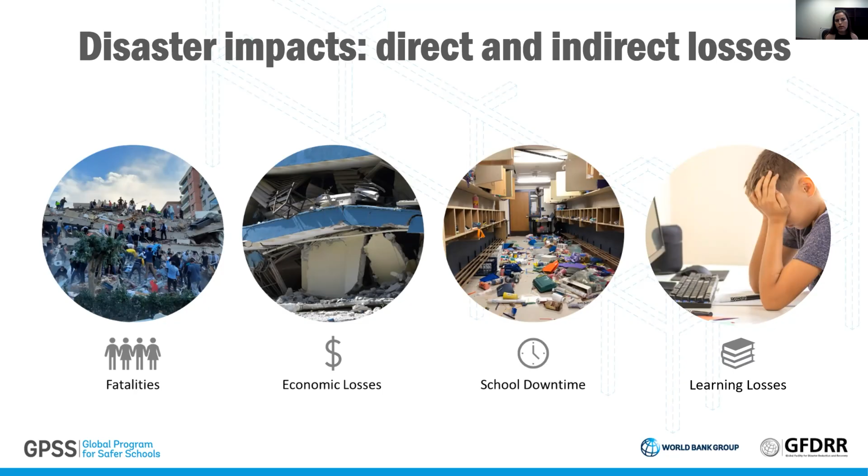And the disaster impacts are not just direct, like fatalities, economic losses, but also indirect losses, like school downtime, that have led to important learning losses, which is compromising education and development, especially in developing countries.

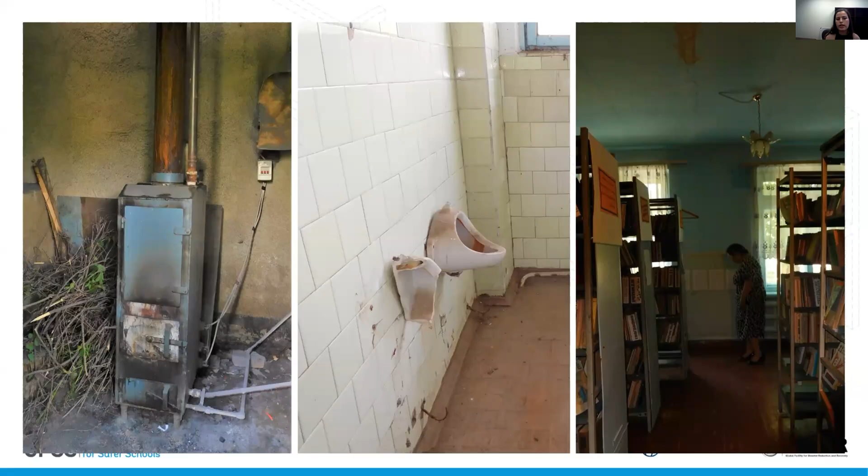But safety is not sufficient. We also learn that schools also need proper heating, they need adequate sanitation and hygiene, and they need fresh air. So they also need other conditions for an adequate learning environment.

There are a number of factors that are placing schools and education at risk. The lack of information of a school baseline, information about the condition, the physical condition of schools. There is a problem of poor quality of the design and poor quality of construction, and also lack of risk and knowledge and preparedness of the school communities.

And of course, lack of territorial planning and land use planning, that many times we are constructing schools in locations that are not safe. There is a problem, especially in developing countries, of outdated regulations. And behind all these challenges, there are the lack of efficient planning and limited resources and limited institutional capacity to be able to improve this entire system.

And there are many actors that need to be actively involved in this process. The government, who is responsible for conducting the policy reforms and investments. The private sector, who plays a key role in implementing safer, innovative solutions. The community, who needs to be aware of the risks and participates in the process of making school communities more resilient.

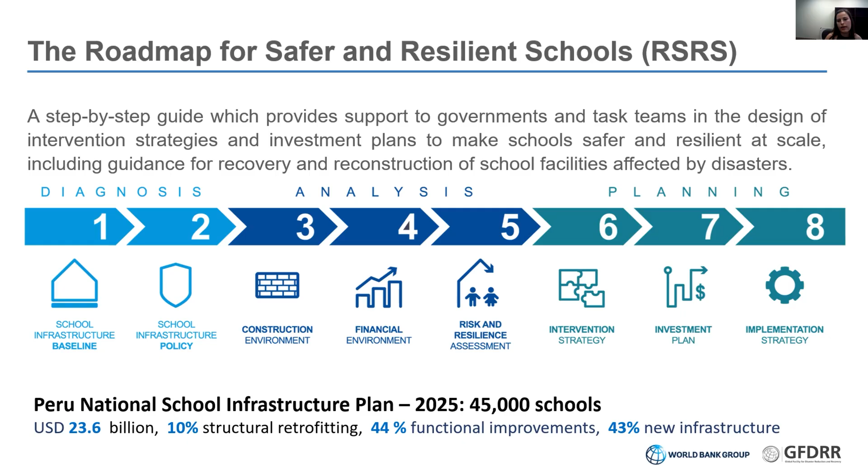And this can be organized into 8 steps. Step 1, under the diagnosis phase, is focusing on having better inventories of school infrastructure, because information is the foundation for the quality planning process. Step 2 is about school infrastructure policy, because we believe education policy should be among the main drivers guiding school infrastructure policy, as we don't want just resilient schools, but good learning environments that promote learning and development.

In terms of the analysis phase, step 3, the construction environment, includes analysis of the construction environment in developing countries to understand what factors are contributing to risk, from designing and planning to maintenance of school infrastructure. It also focuses on the capacity of the construction sector in developing countries to implement more resilient construction and retrofitting solutions. Step 4, the financial environment, aims to understand what financial sources and resources are available for governments in order to identify ways to improve the efficiency of school infrastructure investments.

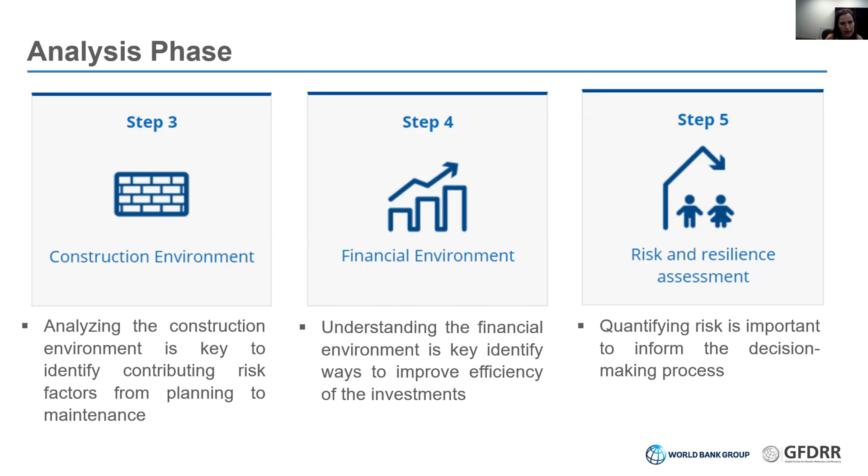Step 5, risk and resilience assessment, aims to quantify risk, because risk information is essential for the process of decision making and planning of school infrastructure investments. The planning at scale phase of the roadmap includes step 6, the intervention strategy, step 7, the investment plan, and step 8, implementation strategy. These 3 steps are basically a school infrastructure plan that includes an articulated proposal of interventions, investments, and implementation arrangements to maximize the benefit for school communities.

So we have been working with governments in different countries, applying this roadmap for these countries to be able to have this school infrastructure plan with very concrete objectives to make more efficient investments in the medium to long term.

And our other global tool is the Global Library of School Infrastructure.

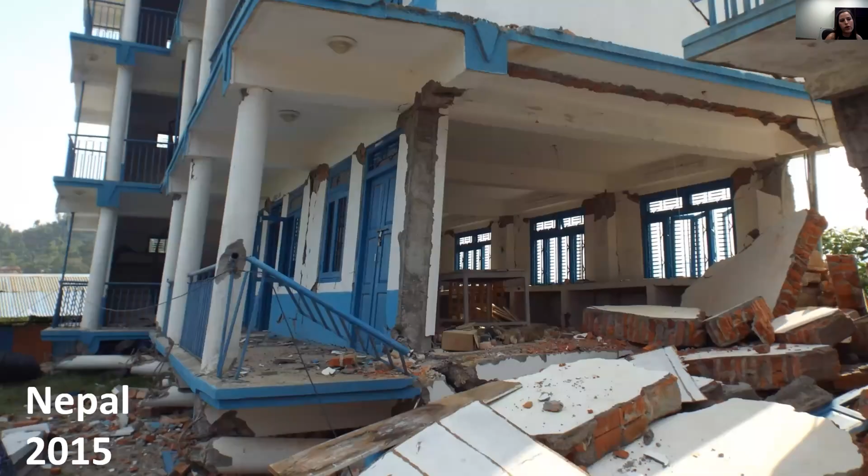The Global Library of School Infrastructure, you will hear a lot about and learn about in this training. For us, this Global Library of School Infrastructure is essential to make knowledge available about different building types around the world. It has been essential to implement these different steps that I mentioned to you in the roadmap.

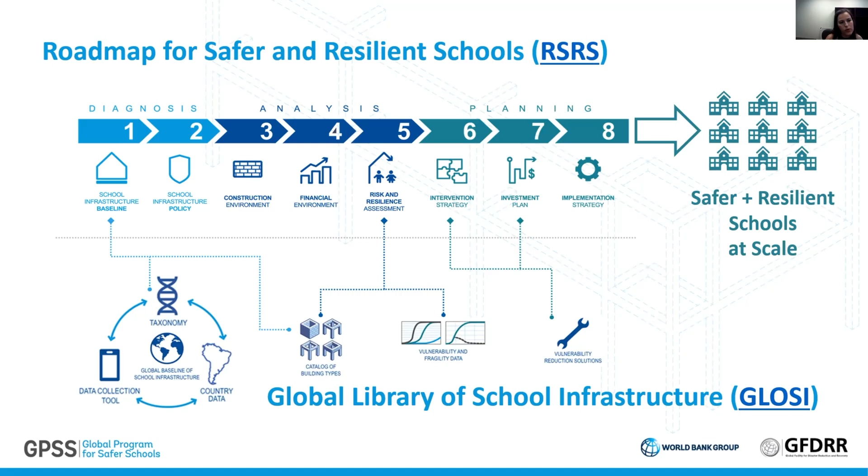The Global Library of School Infrastructure that you will learn about in this training, the roadmap, as well as a description of all the projects that we have implemented around the world, you will find on our website, which is www.gpss.worldbank.org. So you will find more information about our work.

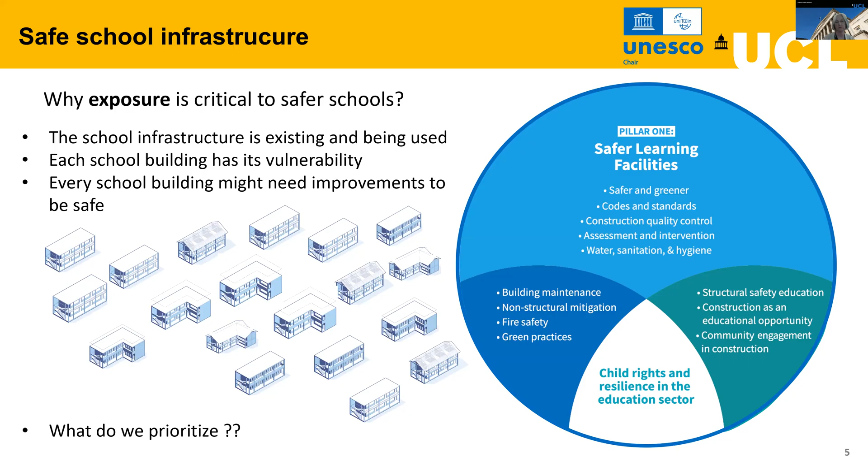So why the GLOSI, the Global Library of School Infrastructure? As you have heard from Karina, the GLOSI responds to at least 4 of the elements of the safe, the roadmap for safer and resilient schools. What we want to see here is the way in which we can build this.

The creation of the baseline provides tools for risk assessment and underpins the intervention strategy and the investment planning. Very importantly, it facilitates communication to decision makers and establishes a common language, and therefore facilitates quantitative risk assessment. In this course, specifically, we will concentrate on two elements of the GLOSI: the taxonomy of constructions and the catalog of building types, with its relation to and its influence on vulnerability.

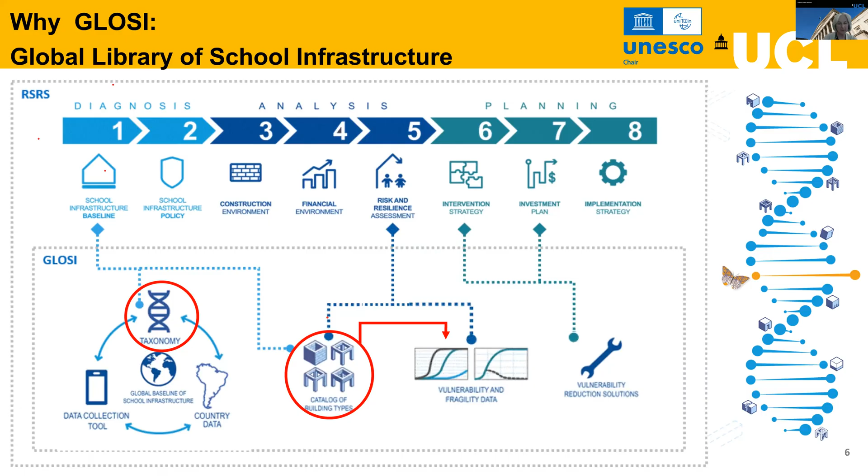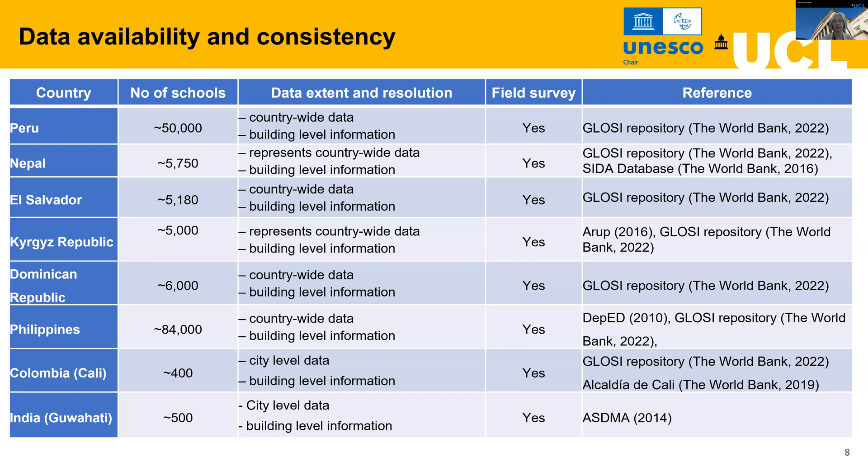From each of these countries, we have obtained different levels and resolutions of data of different quality, but data that is quantitative and that we can bring together to have a better understanding of the actual building stock in each country and across countries.

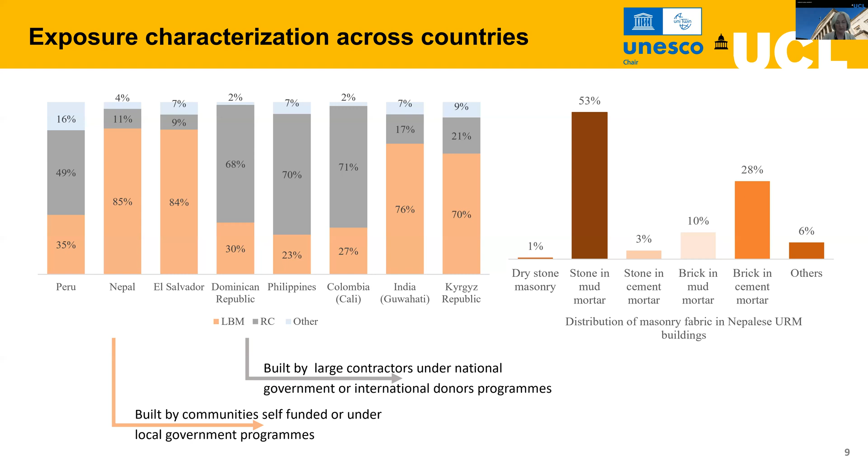Reinforced concrete structures are usually built by large contractors under national government or international donor programs, while reinforced masonry or unreinforced masonry structures are more often built by communities, self-funded, or under very local government programs, which has an impact on both construction quality and the way these buildings are built, directly impacting vulnerability.

Of course, we also need to look at the way in which these are covered by existing building codes. And indeed, this is another element that we are looking at, by examining the age of the buildings.

Here I propose a very, very short history and dating of the process of seismic code enforcement, building and enforcement. And while some of these dates are relevant to the USA and Europe, it doesn't mean that these standards and codes have been applied to all countries at the same time.

Another parameter we look at is the number of stories, because as the engineers among us know, the dynamic behavior is a direct consequence of height, and vulnerability increases with the number of stories. The majority in almost all countries are 1 story, so we are doing well there, but there are larger, taller buildings, while the vulnerability is increasing with the age of the building.

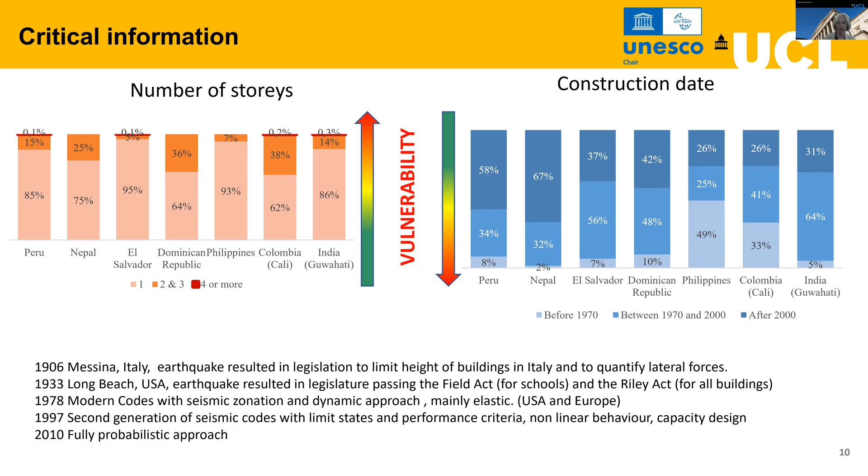So by doing that, we have created a taxonomy made of 12 different parameters. The scoring of each of these taxonomy elements provides a string which then delivers the identification of a particular index building.

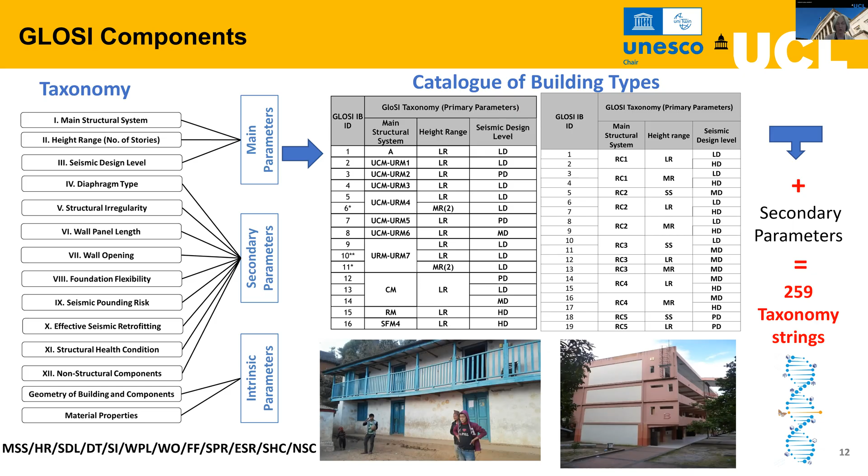You will hear about this in detail in the next presentation, so I'm not going through this any further, except to say that as a result of this, we now have in excess of 250 taxonomy strings in the GLOSI catalog. Besides the catalogs, there are other three components.

The vulnerability, the retrofitting, and the data collection. You will hear about the vulnerability and the retrofitting in the lectures tomorrow, not so much about data collection, because this is directly related to particular activities of creating the next elements and the next catalogs to enrich the catalog in a consistent manner.

So how would you do that? By basically identifying a building, asking the following questions: what is the main structural system? What is the design level? What is the height of the building? Is this building available in the GLOSI catalog? No, it's not. So we need to define a new index building.

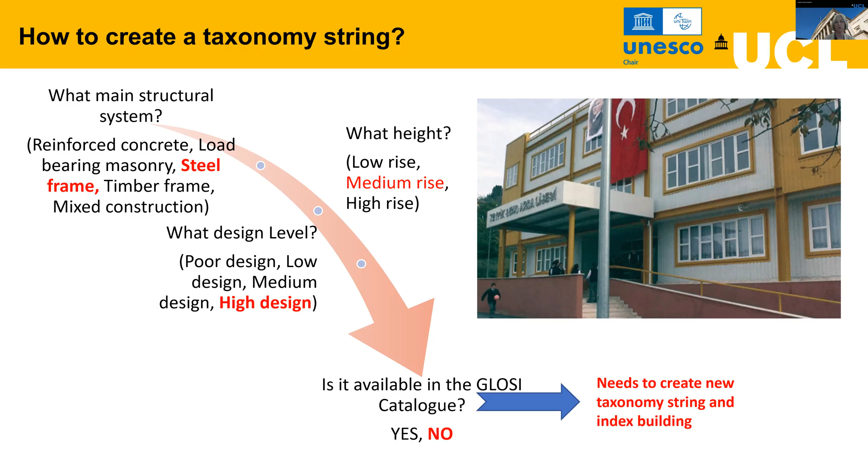Then you will ask some more specific technical engineering questions, and the answers to these questions, which are part of the 12 parameters of the taxonomy, will deliver a new taxonomy string. You will see all of this in the rest of the presentation.

And so without further ado, I will leave the microphone to my colleagues and collaborators, whom I had not introduced earlier: Rohit Adhikari, Rafael Fernandez, and Asana Paramal Bhatteri, who will present the next set of lectures.

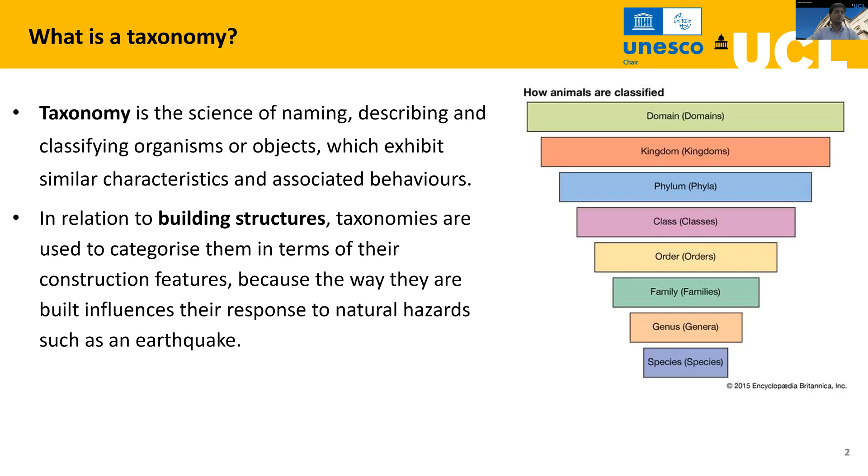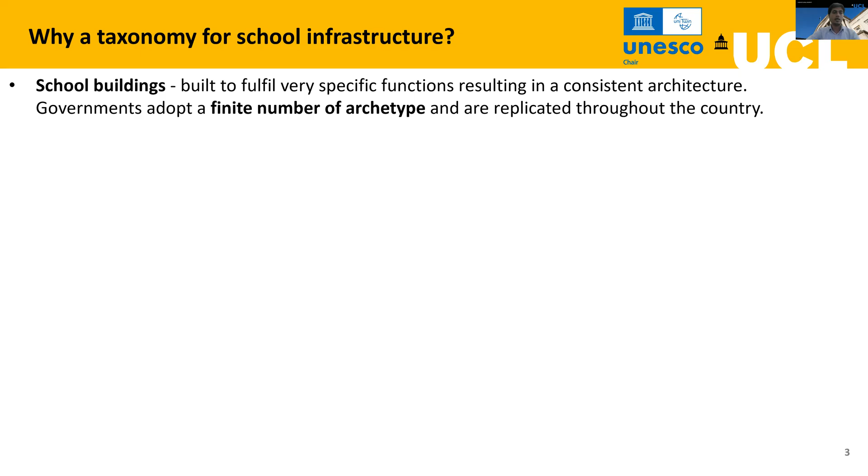So why do we need a taxonomy for school infrastructure? Adina, in her presentation before, already discussed the details about schools, how they are built across different countries, what are the similarities and differences, and how a taxonomy can provide a uniform language so that information at global level can be exchanged, saving time, cost, and effort to understand the vulnerability and risk to our school infrastructure in different countries.

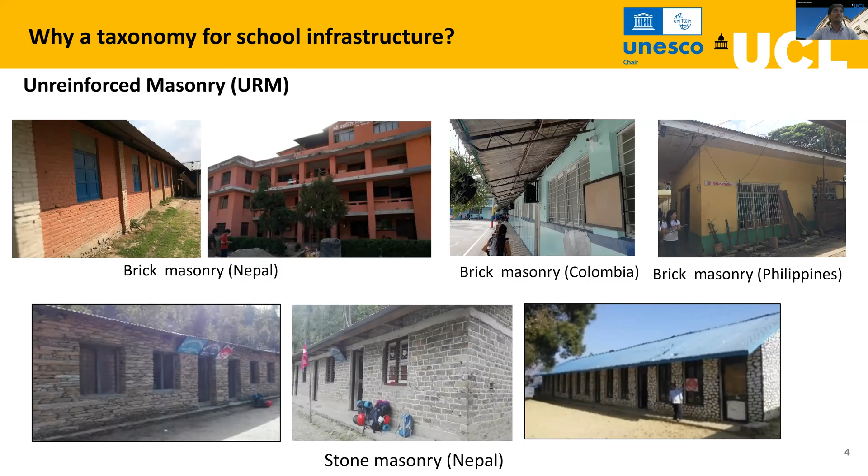Also, the masonry fabric is different. For example, in some cases they are brick masonry in cement mortar, mud mortar, rubble stone masonry, or dressed stone masonry, and so on. So there are a lot of variations in each of these buildings. And also in modern masonry construction, for example confined masonry and reinforced masonry, you can see different details - the tie columns, the tie beams - different details are available in different schools from different countries. So in terms of seismic performance, it improves as we move from unreinforced masonry to confined masonry to reinforced masonry.

Depending on its construction type and associated construction features, the damage patterns of our schools differ. For example, in the first photographs you can see the out-of-plane damage of the walls. In the second, you can see the in-plane damage. And below, you can see the confined masonry damage patterns. So if you notice the damage patterns, they are specific to the buildings and depend on the construction characteristics in the school buildings.

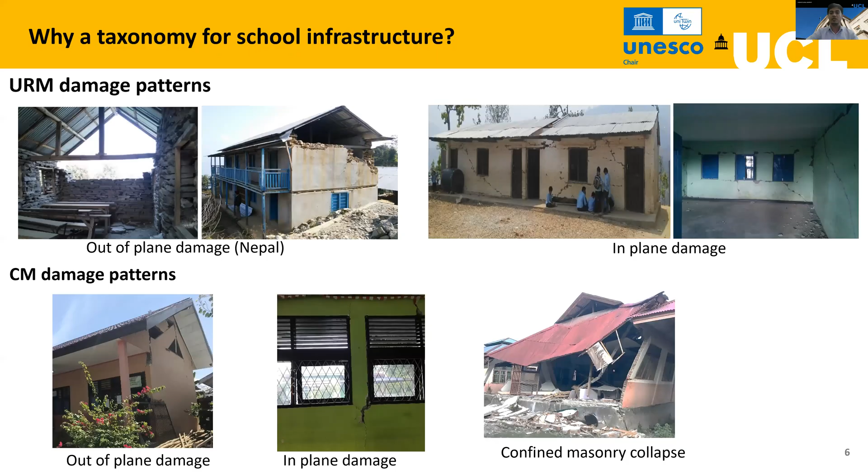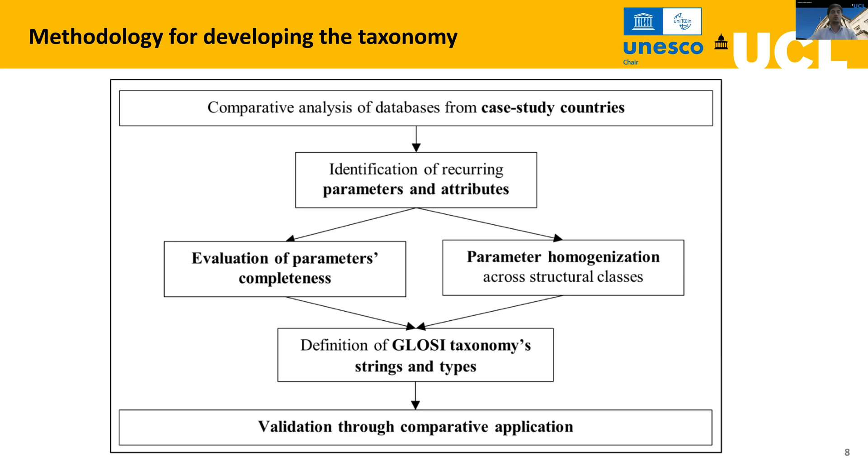So this is the overall methodology we have adopted for the development of the GLOSI taxonomy. First, we analyze school databases from different case studies, mostly collected by the GPSS program of the World Bank, and we also did field surveys to cross-validate the information. Then we identify similarities and differences among the structural characteristics, so we can identify the main parameters and their variabilities, ranges, and attributes that affect seismic performance. After establishing the parameters and taxonomy, we validate these in both qualitative and quantitative ways by applying them to different case studies from different countries.

When we look at our school buildings, there are some generic parameters that highly influence the seismic response - for example, the material and technology used in construction. Unreinforced masonry doesn't have much seismic enhancement measures, while confined masonry is an improved design with tie columns and tie beams and a reinforced concrete frame. So these are the main construction types recurring in our school buildings, and therefore we are focusing our taxonomy development with respect to these three main categories of schools.

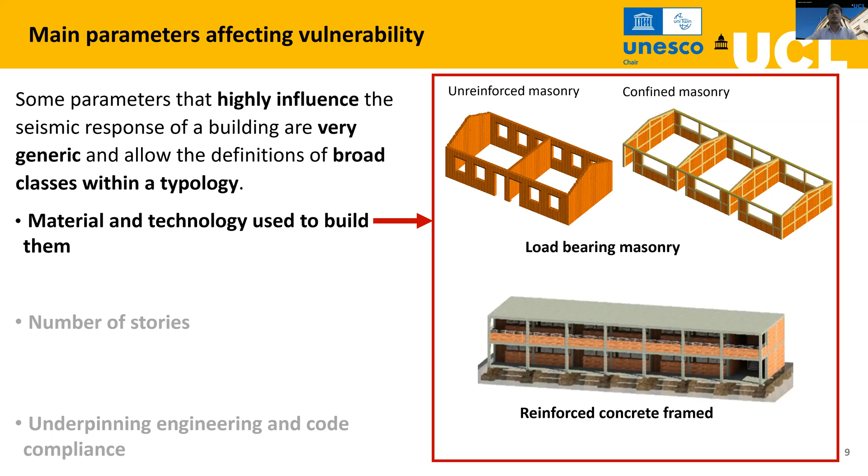Then we have the second parameter that highly affects our school's seismic performance: the number of stories. That is how high the building is, because it affects the vibrational properties and dynamic behavior of buildings during earthquakes. The third important parameter is the design level.

That is the engineering or code compliance employed in the buildings. For example, compare these three figures: in the first one, there are no seismic bands or buttresses. In the second one, we have a lintel band, which improves the global behavior. And in the third, we have both buttresses and a number of bands at different vertical levels.

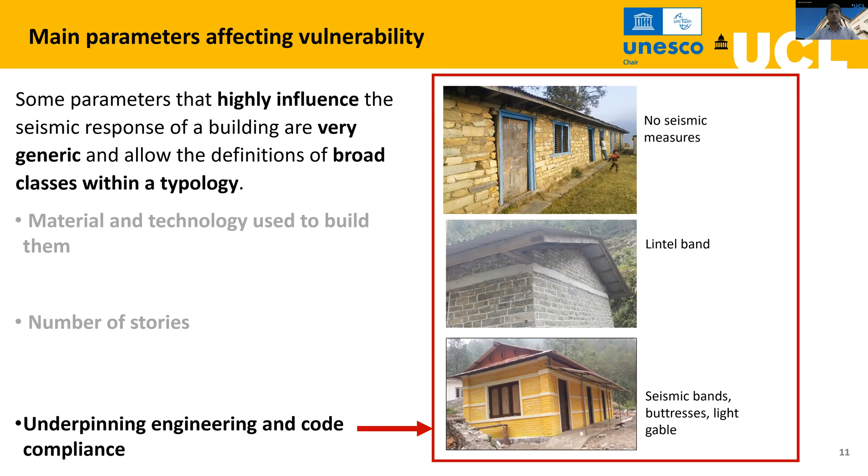We also have other parameters that can affect a building's seismic performance. For example, the floor or roof type, how large the span is, what the foundation types are, the pounding risk or proximity to nearby buildings, what non-structural components are in the building, and what its structural health condition is.

So we will go into details of each of these parameters in this presentation. Each of these secondary parameters can also influence the seismic performance of a typology.

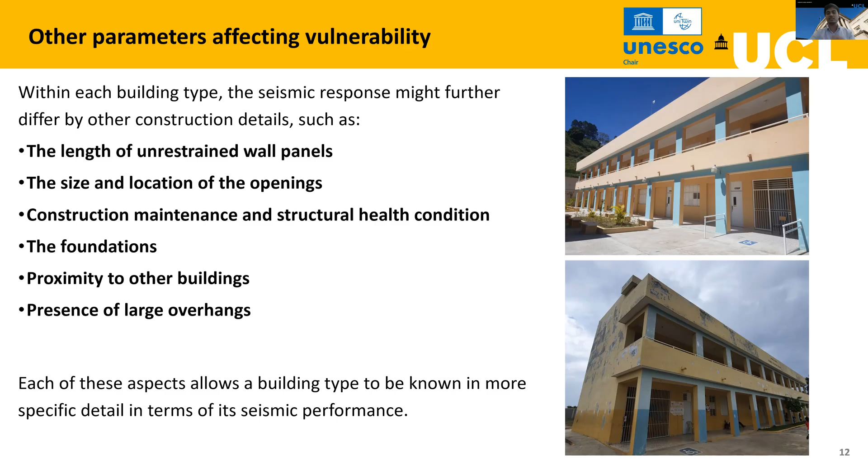After introducing those, we give you here the 12 taxonomy parameters, grouped into primary and secondary depending on how much they influence the seismic response: the main structural system, height range, seismic design level, diaphragm type, structural irregularity. All the factors that can influence the structural and seismic performance of your building are covered here.

We will go into details of each of these parameters in the next slides. This shows an illustration of the different parameters, 12 in total, that we are considering in the taxonomy.

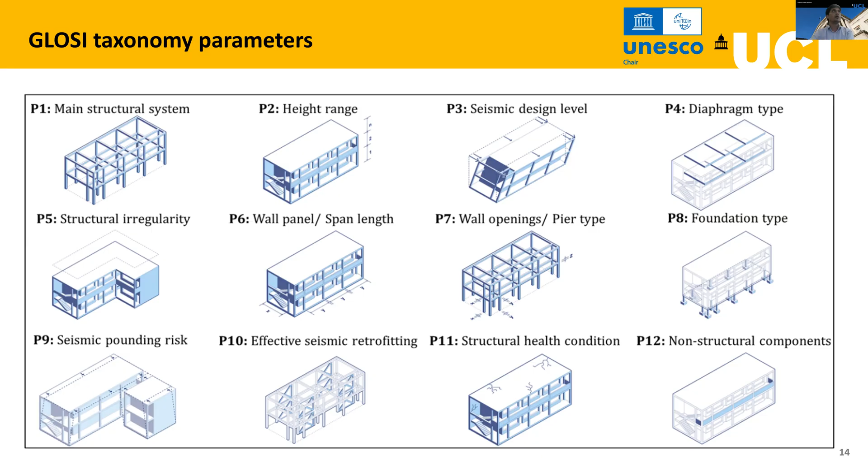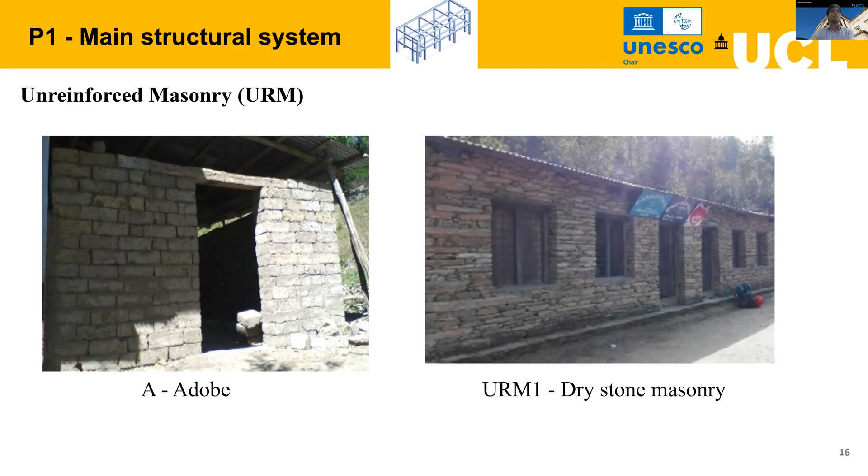We start with the first parameter, the main structural system. I will introduce first the unreinforced masonry, URM, under which it could be adobe, dry stone masonry, or dressed stone masonry, brick in mud mortar, brick in cement mortar, stone in cement mortar, and within stone we have rubble stone and dressed stone.

Each of these different masonry fabrics influences the seismic performance, as well as performance to other natural hazards such as flood. For example, during flood, the resistance of mud mortar is of course very low compared to cement mortar. Similarly, a rubble stone masonry would perform poorly during earthquakes compared to a dressed stone masonry or a brick masonry.

And we have different variations within confined masonry as well. My colleague Asana will introduce those to you.

Hello. So we discussed confined masonry being an improved design over unreinforced masonry. What makes it different is that here the masonry panels, mostly unreinforced masonry panels, are confined within reinforced concrete elements, tie columns and beams, which are not as strong, thick, or elaborately designed as reinforced frame elements.

So the first category, CM1, is the most common typology we see in many countries, with brick in cement mortar. We also came across some other variations of this, which is why there is a subclassification within the CM typology.

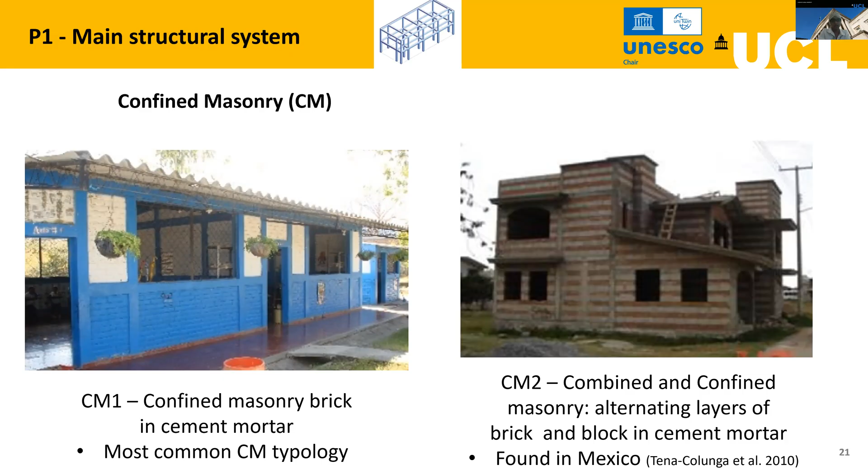CM2 is the combined and confined masonry, where the fabric is not a uniform brick masonry material - instead it has bands of brick and blocks alternating, which also creates a nice pattern. More importantly, it reflects how the material is sourced and available in the region where it's observed.

Similarly, we have confined masonry with bed reinforcement. As I mentioned before, in general when we say confined masonry, the masonry fabric itself is not reinforced. But here we see some improvements, as seen in buildings in Indonesia, where they started building after the 2004 tsunami and earthquake events, incorporating an additional reinforcement feature. This adds features of reinforced masonry into the confined masonry.

Similarly, the fourth category is hybrid confined masonry construction, where instead of having the same reinforcement within the masonry, we have orthogonal walls in a different typology, in fact.

This is observed in Chile, where one set of transverse or longitudinal walls are confined masonry, while the other set is reinforced concrete or reinforced masonry. So this is about confined masonry.

I will now pass on to our colleague Rafael for reinforced concrete. Thank you, Sana. Similarly to what we have seen for the URM and confined masonry, reinforced concrete is also divided into 5 categories.

The first one is RC1, which refers to simple RC frames, buildings in which the masonry infills do not interact directly with the structural elements. This occurs because they have a seismic gap that lets them move differently from the complete structure, or because the partitions are light infill walls.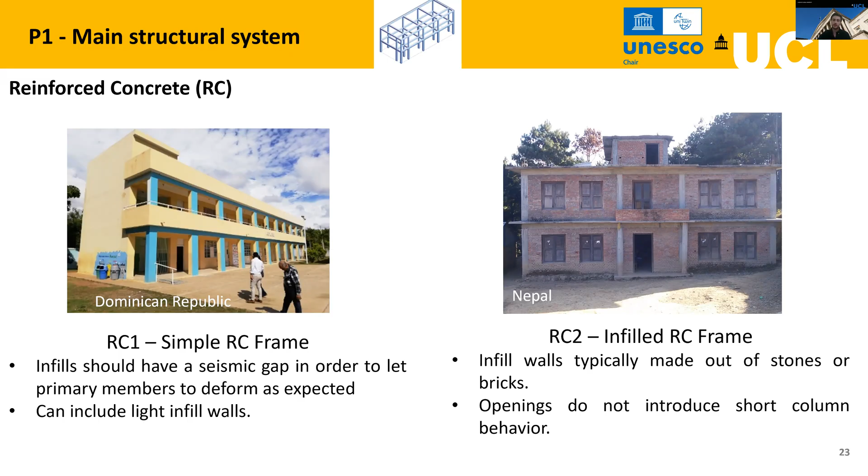Then we have RC4, the combined or dual systems. This can be, for example, a retrofitting of the above typologies, but ultimately it's a typology with a moment resistant frame plus another stiffening element, such as a shear wall, as seen in the picture, or a type of steel bracing. These are usually located on the perimeter of the building, but depending on the particular characteristics, they can be located elsewhere.

Finally, we have RC5, non-engineered buildings that may or may not generate moment resistant frames, but the structural elements are inadequately distributed, or the reinforcement bars are insufficient and not engineered or designed to resist lateral forces. So what we expect in this RC5 category is generally poor seismic performance.

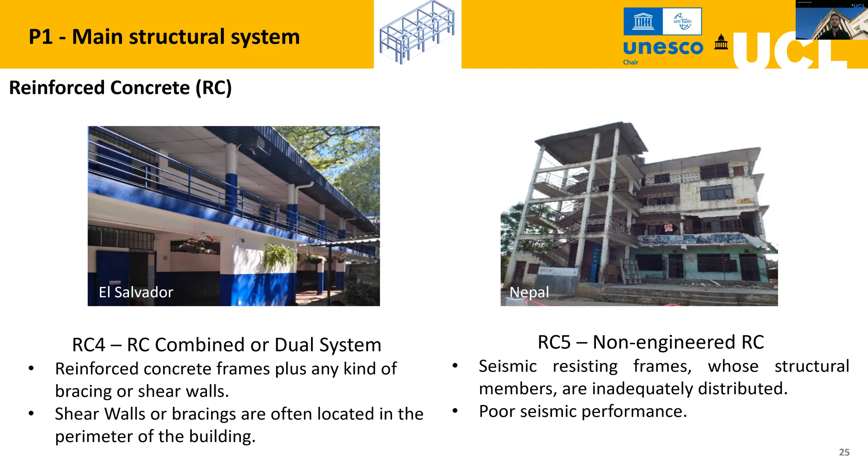I will give the word to Rohit so he can continue with the presentation. Thank you both, Sana and Rafael. Now we move to the second parameter, the height range, the number of stories, as you can see in the figures.

The number of stories affects the seismic response because it controls the dynamic properties of the building during lateral loading. For example, single-storied or two-storied buildings behave mostly in their first mode. But as the number of stories increases, higher modes come into play and can interact, so vulnerability increases as we go higher with the number of stories.

Because single story buildings are most common in schools, we have categorized single story as a separate category, while 2 and 3 stories are categorized as medium rise, and 4+ stories are categorized as high rise buildings.

The third parameter is the seismic design level, and I will first detail this with respect to unreinforced masonry. In this building, we cannot see every detail, but you can read poor cross-wall connections. There are no well-built cross-wall connections at the intersection between walls, and no seismic enhancement measures, such as horizontal bands, ties, or buttresses. Therefore, this is categorized as poor design.

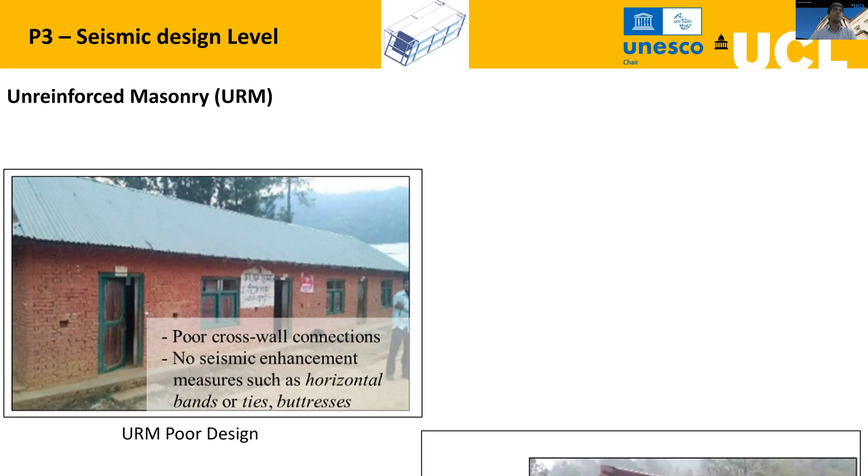Now I will show you the upper limit of the design level, which is high design. In this photo, you can see the buttresses, the number of bands at lintel level, sill level, intermediate level, and roof level. Also the gables, as you can see, have been made of light materials, so non-structural vulnerability is reduced. Therefore, the design level here is high.

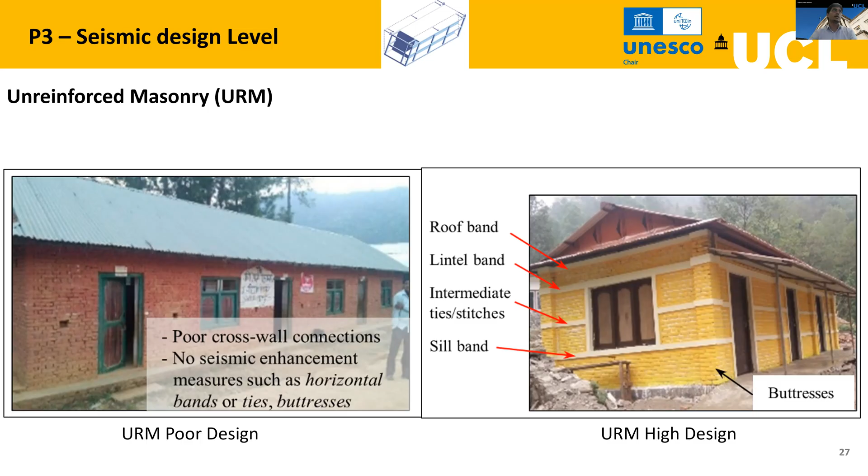In between, we have low design and medium design. Low design has few local seismic enhancement measures. Medium design mostly has seismic enhancement measures at wall level, but also at least one component at global level, for example, the lintel band in the building. Thank you, and now we move towards confined masonry seismic design level.

So when we come to confined masonry, we understand that we first have to identify the difference and how do we call a building either a URM or a confined masonry building.

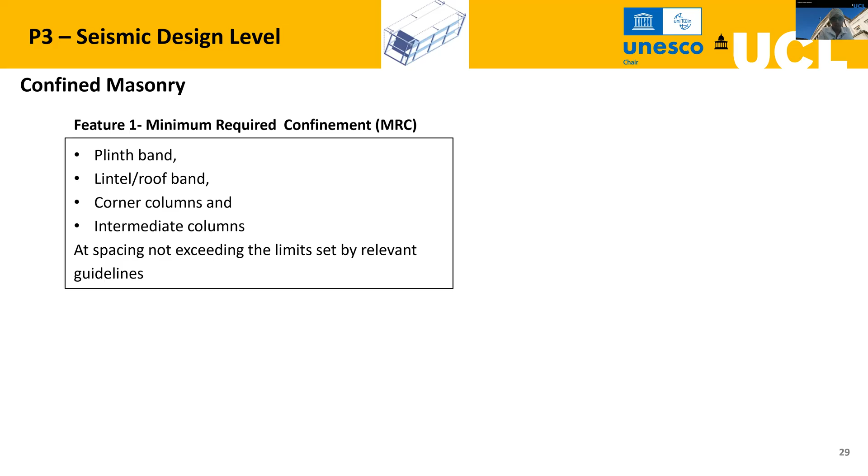For that, we have defined something called minimum required confinement. You need confinement around all 4 sides of the wall panel, either in the form of plinth band, lintel, or roof band, plus corner columns and intermediate columns at specified spacing. There are existing national level construction codes for confined masonry, either as a specified design guideline or a completely calculated member design code. If we have at least these elements, we call this building confined masonry, and depending on the variation in the level of confinement, the design level could vary.

The second feature is the good connection between the masonry elements and the tie elements. In traditionally confined masonry, first we build the masonry wall to a particular height, then cast the concrete columns or beams in place, so there is a very good integrated connection between masonry and tie columns. Where this is not possible, it is required to have dowel bars that ensure good connectivity. In many cases it's difficult to judge this after the building is constructed, especially if surfaces are plastered, so if there is evidence of good connection at the interface, we consider that feature present.

Thirdly, we have a consideration of wall density. In prescribed guidelines such as the EERI guideline and other national guidelines in Chile, Peru, Mexico and so on, we have this parameter called wall density, the percentage of area in each orthogonal direction as a percentage of the total area of the building. This can be a function of the seismic hazard intensity expected at the site, the soil conditions, or the number of stories of the building. Depending on these factors, there are specified minimum wall density values required for the confined masonry building to act as we desire.

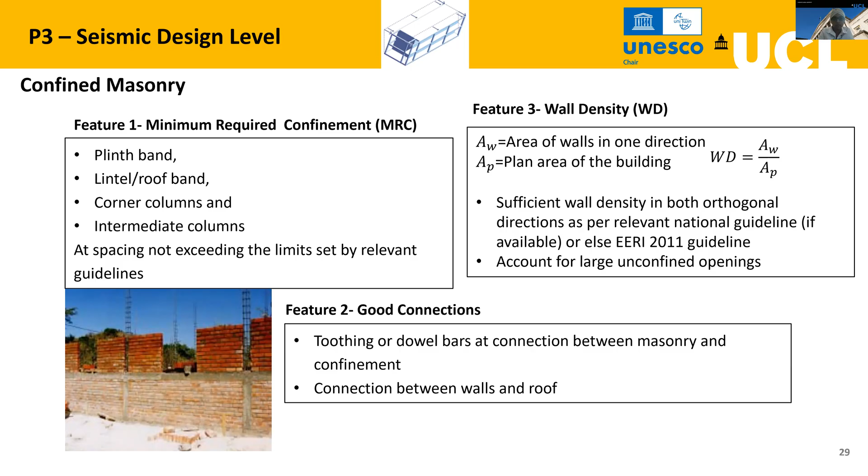Based on these 3 factors, we can decide the level of seismic design in a building we are observing on site with the help of this decision chart. We need to have this minimum required confinement as a basic criteria, and if that is not met, we consider that building not a confined masonry building—it could be an URM or unconfined masonry building.

If that condition is met, we then look for the connections. If the connections are poor, we call that a poor design within confined masonry. Once you have good connection, check the next condition, whether it has adequate wall density or additional bands that at least guarantee the performance of the confined masonry panel. If that's not available, it goes to low design. If yes, we then check for the diaphragms. If the diaphragm is rigid, this condition itself is sufficient to call it a high design. If it's a flexible diaphragm, it needs additional bracing to ensure lateral load transfer capacity, so we don't have out-of-plane or local failure mechanisms. In its absence, we call it medium design.

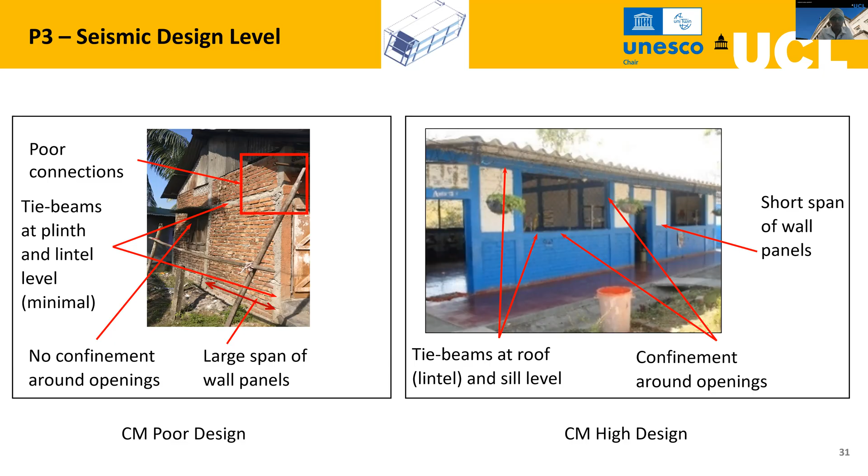For example, on the left you see a building with poor design. Although the wall panel has confinement around a particular masonry panel, the connections are poor and there is no confinement around the opening. This is another factor we'll discuss further—for a confined masonry panel to act as an in-plane shear wall, we need confined openings. On the right, we have CM with high design, where all the openings are confined, and we have short spans of wall panels which are well confined. In between these, we have the low and medium design, as explained using the decision chart.

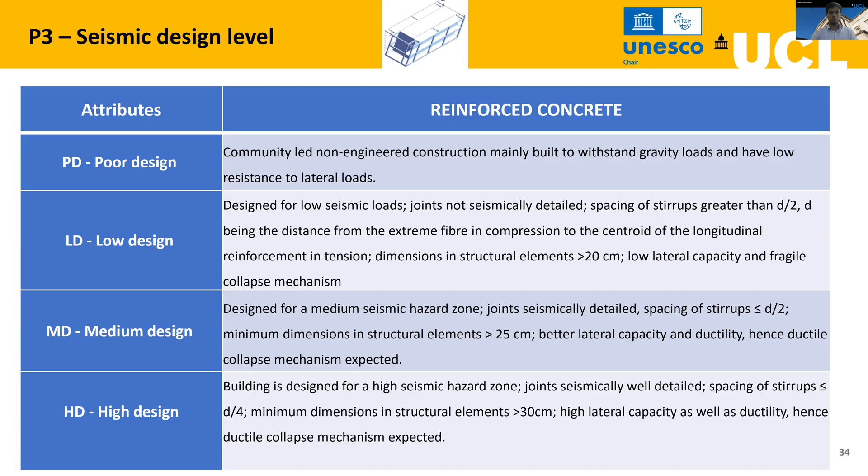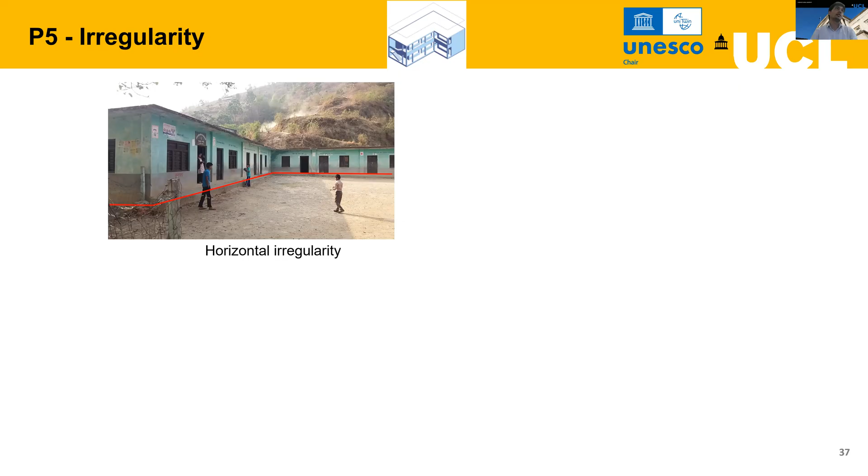Parameter 5 is irregularity, which includes horizontal irregularity, as seen in this L-shaped building plan, or vertical irregularity, common in reinforced concrete buildings, such as soft story and weak story collapse mechanisms.

The taxonomy parameters for irregularity are: no irregularities at all, horizontal, vertical, or both. Horizontal irregularity might include torsional irregularity due to plan shape or reentrant corners, diaphragm discontinuity, and so on, while vertical irregularity can include soft story, weak story, mass irregularities, and so on.

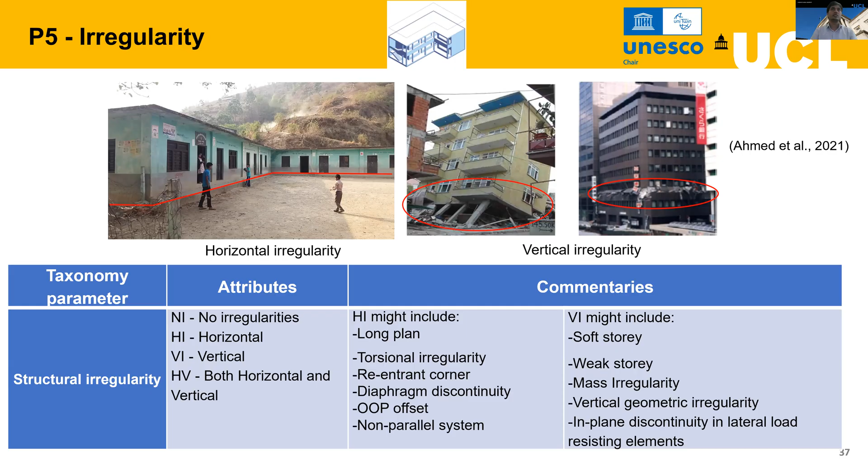The sixth parameter is the wall panel length for masonry buildings.

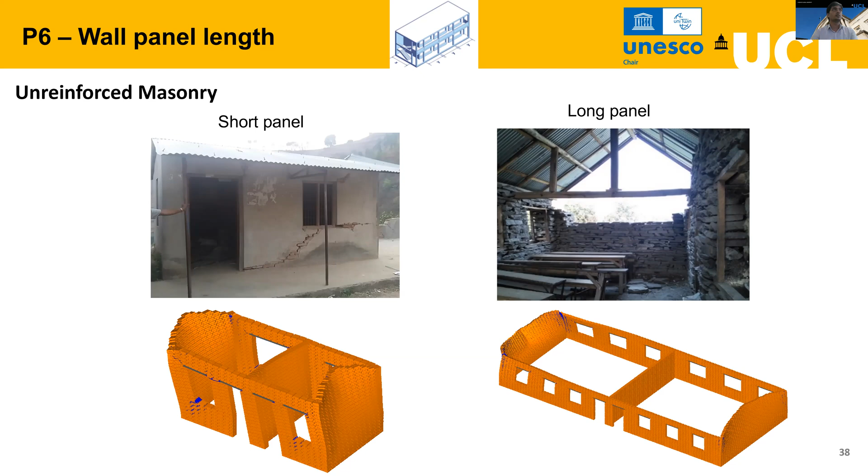For unreinforced masonry, it's general to consider a panel long if the panel length is more than 12 times the thickness of the wall. For confined masonry, if the wall thickness is 110 millimeters, then less than 3 meters is a short panel. Similarly, if it's 4 meters or less for wall thickness more than 250 mm, it's a short panel; otherwise longer than that is categorized as long panel. For reinforced concrete buildings, up to 6 meters is considered short panel, while more than that is long panel.

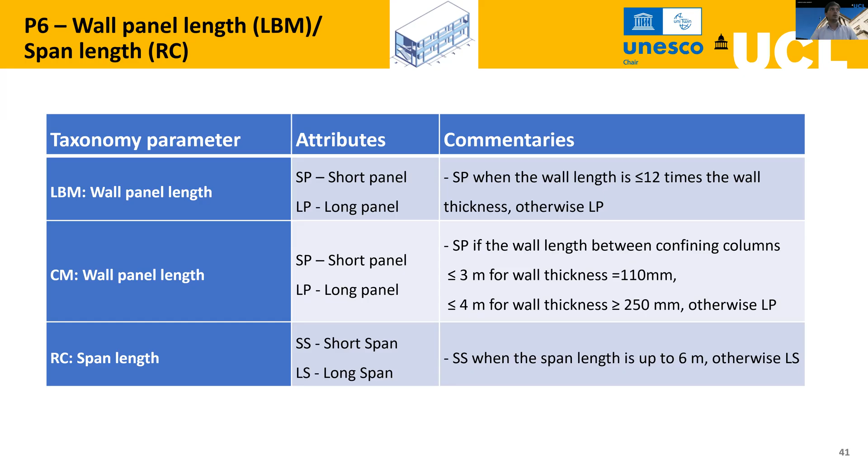The seventh parameter now is wall openings. The configuration of openings, their size, and layout affect the seismic response, including whether they are at the end, whether they have certain clearance from the ends, and so on.

For URM buildings, we define openings as small or large. If it's 50% or less of the panel, it's small openings; if more than 50%, it's large openings. We consider the openings relative to the panel length to decide this. These photographs show the difference: in the first case, in each panel the amount of opening is more than 50%, while in the second photo, the amount of openings in each panel is less than 50%.

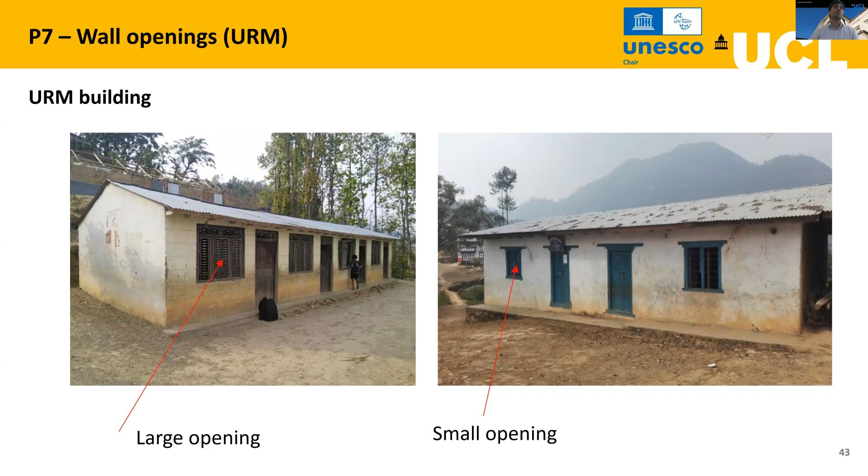For confined masonry buildings, we discussed the importance of confining the openings in wall panels. This is because when we calculate the wall density parameter for each orthogonal direction of the building, we need to ensure sufficient masonry piers which are well confined, without the opening space included. Based on experimental studies, 5% of opening area within a confined masonry panel is found to have no significant influence in reducing its capacity. So any opening smaller than 5% is considered a small opening that can be left without confinement. These guidelines on what percentage is small or large vary from country to country in their national codes; what we identified is what is reasonably okay based on experiments.

When it is larger than 5%, we can have a large opening without confinement, which would negatively influence the performance of the panel. One way around that, especially for schools where larger openings are needed, is to confine the opening completely on all four sides. Based on this, we have identified three categories. For the next parameter in RC, Rafa will explain.

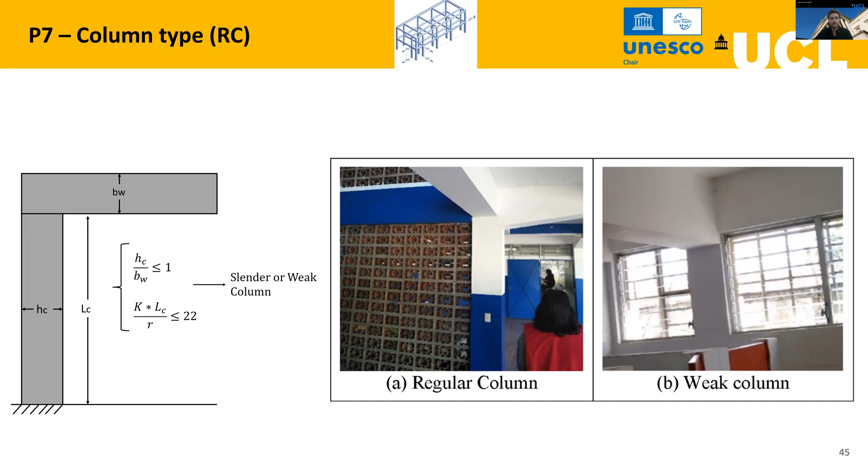When talking about RC buildings, the equivalent of piers and spandrels are the columns and beams. For this same parameter, what we measure is the relationship between the behavior of the columns and the beams. The expected good behavior is a strong column and a weak beam, so this is precisely what we want to measure. There are equations for this, and we characterize whether we have a regular condition where failure begins first in the beam and then occurs in the column, or the opposite condition, a weak column where the column fails first, which is exactly what we don't want.

Similarly to the previous parameter, we have different categories for URM, CM, and RC, defining small or large openings for the first two cases, and for CM in particular, we also consider the difference between confinement and without confinement.

So we have LOC and LON, and for the column type we have weak column or strong column as the different attributes that this parameter will take. Now I will continue with the last parameters.

As you remember, and as Rohit mentioned, we have 8 parameters. The 8th one is the foundation type. Here we need to consider 2 particular things. The first is how the foundation is built - for example, if we have a wall footing, an isolated footing, a raft foundation, combined footing foundations, or some deep foundations because we have a very tall building. So this should be considered.

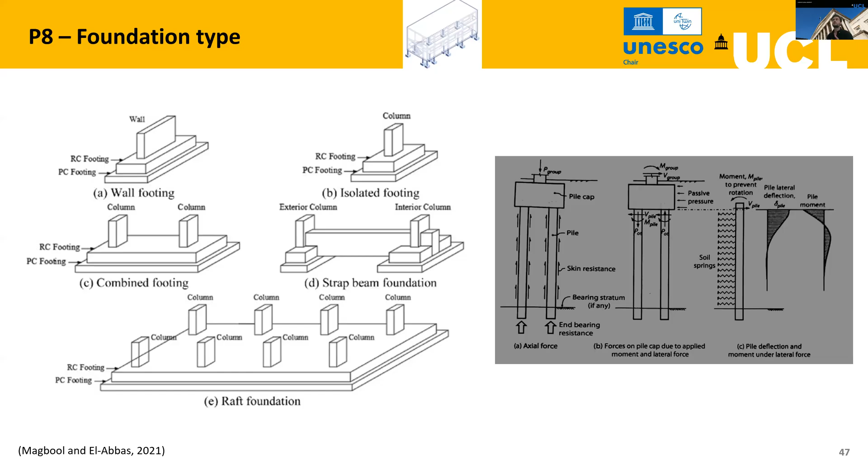In particular, for the case of unreinforced masonry and confined masonry, it is very common to have this shallow foundation in which, at the end, it's built like a big beam in brick and cement mortar, and this of course depends on the soil. So precisely the above condition should also be understood together with the site classification.

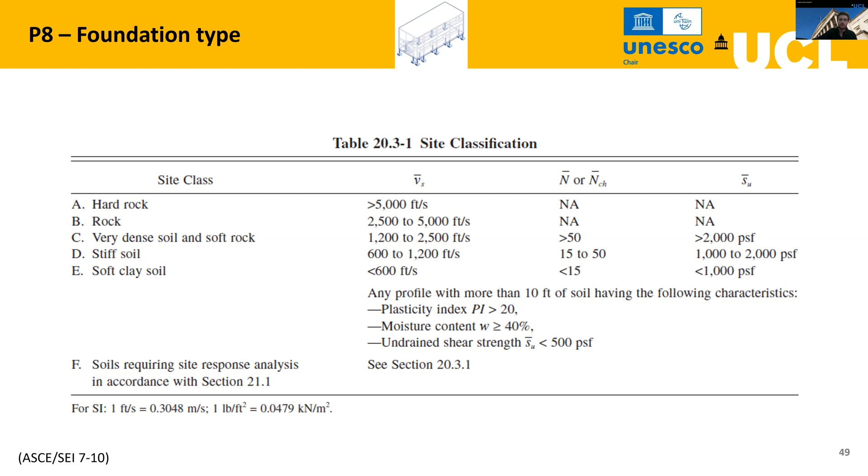For example, if we have a shallow foundation in a hard rock, the behavior will be different than a shallow foundation in a very soft clay soil. So the combination of both should be considered, and at the end the two attributes that this parameter will take are flexible foundation or rigid foundation. As I mentioned, this depends on two factors: the foundation details, and the soil type condition. The combination of the two factors will give the type of foundation.

Here is one example: a 1 meter deep strip type foundation made of brick masonry. In a hard rock site, this will be considered a rigid type foundation.

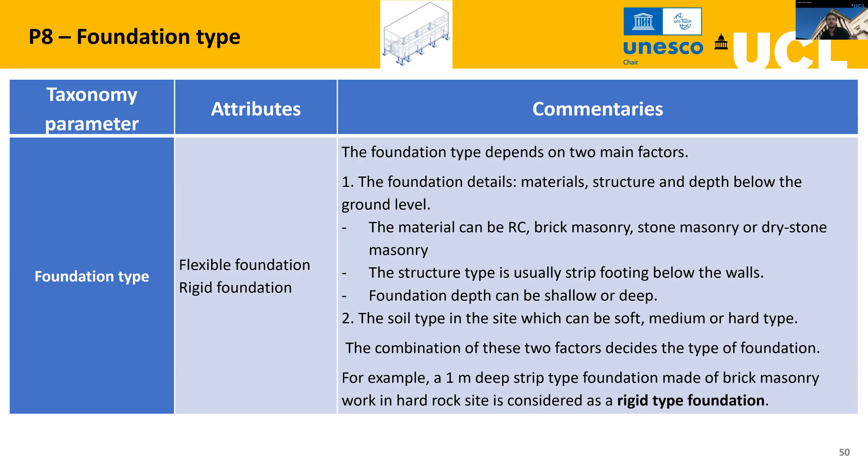This is of course very difficult to find in the field just from a visit, but this information can be taken if the structural details of the building, for example the structural drawings, are available, along with the different soil tests that were used for that design. But if this is not available, additional type of tests can be done.

The 9th parameter is the seismic pounding risk. It is important to understand if there is any adjacent building that, with the movement produced by an earthquake, will have this pounding condition. We have seen this in several school buildings in which they built 2 separate buildings very near each other because of space constraints.

At the end, the 2 attributes we will have here are pounding risk or no pounding risk. So if the building is isolated with no surrounding buildings, we will have a no pounding condition. For this, we defined a gap between buildings less than 4% of the critical height, which is the height of the shortest building.

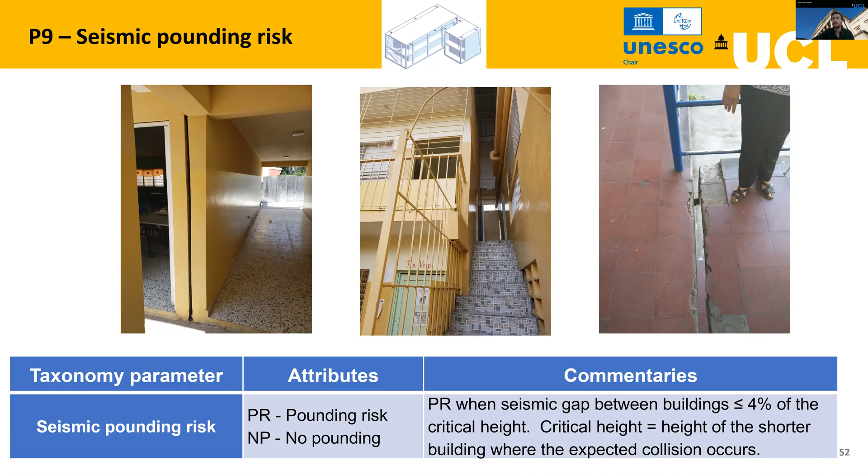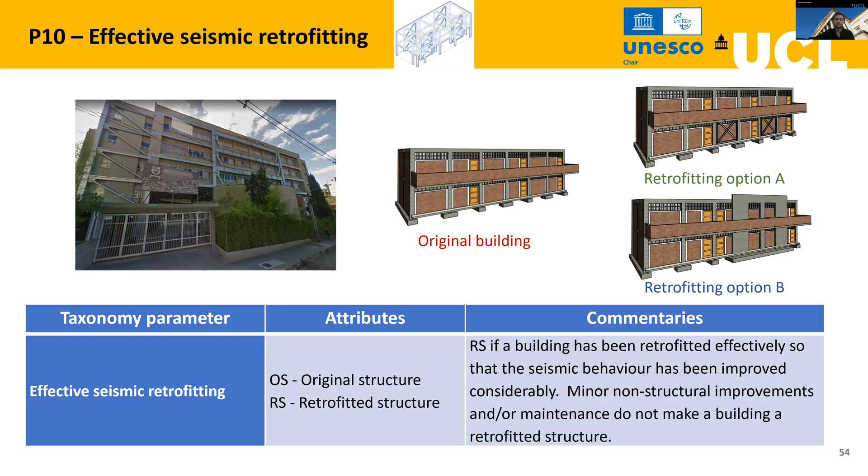For example, for this school building presented here, there are 2 different retrofitting options: the first one with steel braces, and the second one with a shear wall built in this particular frame. At the end, the attributes will be whether the structure is the original structure, or if the structure has been retrofitted in the past.

The 11th parameter is the structural health condition. We want to understand how the current condition of the building is - for example, if it had poor workmanship and now the condition of the walls is poor, if there are any cracks or damage in the structural members or components. For example, in the case of RC buildings, if there are any exposed rebars and stirrups that may generate some type of deterioration in the steel rebars.

With this we can then classify the buildings into 3 conditions: poor, fair, or good at the moment. This will affect the vulnerability negatively - if the structural health condition is poor, then we will have a more vulnerable building.

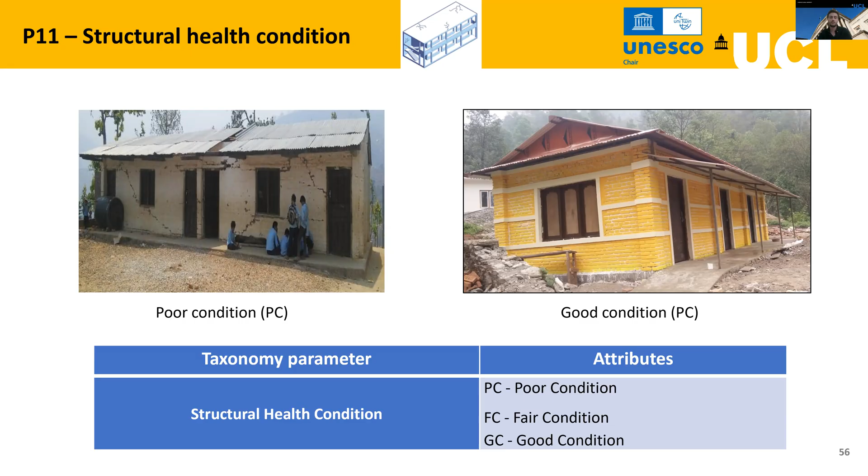Finally, the 12th parameter refers to the non-structural components. Here we talk about components that are non-isolated from the structure, that have inadequate reinforcing or connection details, and there is no type of seismic bracing or anchorage.

The main problem with these non-structural components is that they can cause human losses, but also economic losses in the building. For example, these types of parapets can fail out of plane in the case of an earthquake, making an additional risk to the occupants of the building.

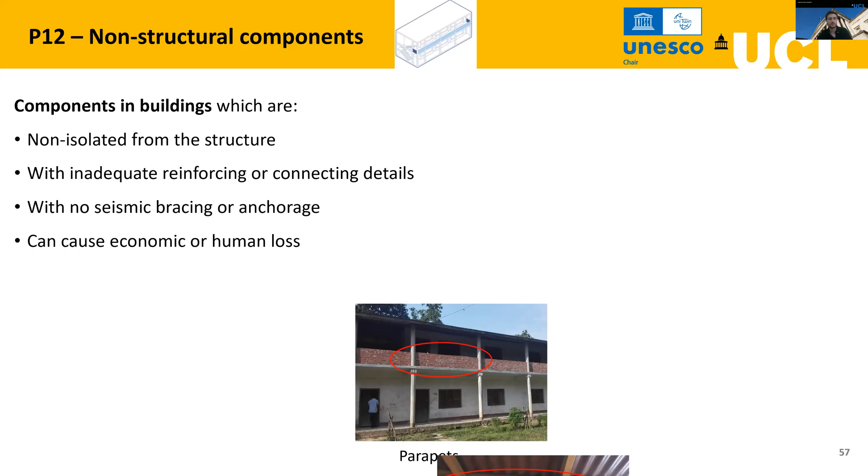So this is the last parameter of the taxonomy. We have covered the 12 parameters.

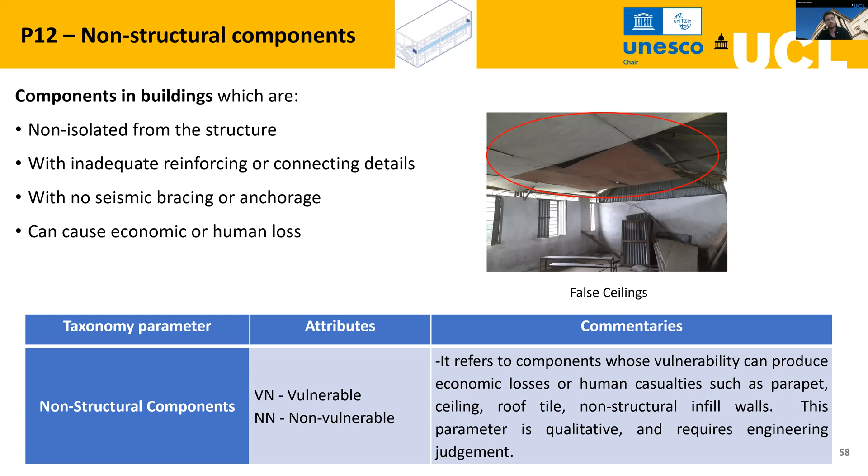Now, in the next session, which will also be given by the three of us, we'll talk about taxonomy application examples. We'll talk about an example of a URM building, then we will present a confined masonry example, and we will finish with a reinforced concrete example. So I will give the floor now to Rohit.

Okay, thank you very much, Rafa. So now, after introducing the details of each parameter and their attributes of the GLOSI taxonomy, we are now moving towards the application examples of the taxonomy.

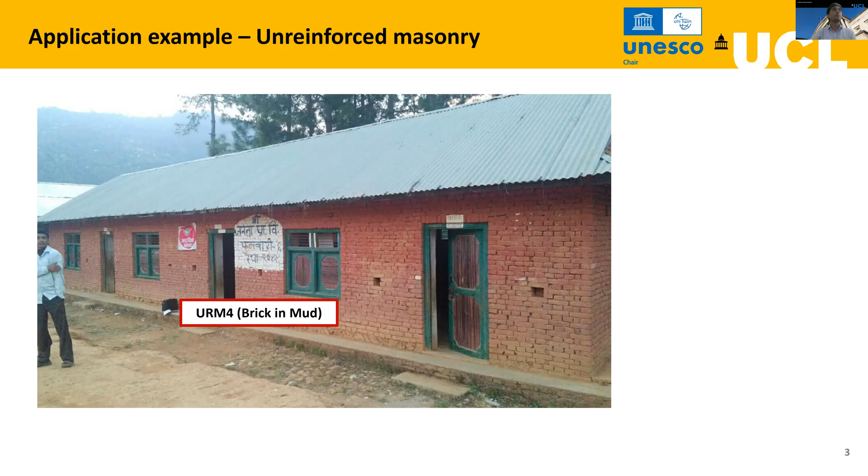In this building, the masonry fabric type is brick in mud, as you can see, therefore its category is URM4. This is a single story building, therefore low rise. Although these elements you cannot see, there are no seismic bands in this building. There are no buttresses, and the wall is quite thick and built in English bond, which is a good bond, making good cross wall connections. Therefore, the seismic design level is low.

It's a rectangular plan building. There are no vertical irregularities, of course, therefore no irregularity for the fourth parameter.

The wall panel length is quite long, more than 5 meters and more than 12 times the wall thickness, therefore it's a long panel. The openings are small, as you can see. The total length of the openings is less than 50% of the panel length. And the foundation, it's not easy to see inside, but it's less than 800 millimeters, a shallow foundation.

But it's throughout all the walls, so we consider it a rigid foundation. It's a strip type foundation.

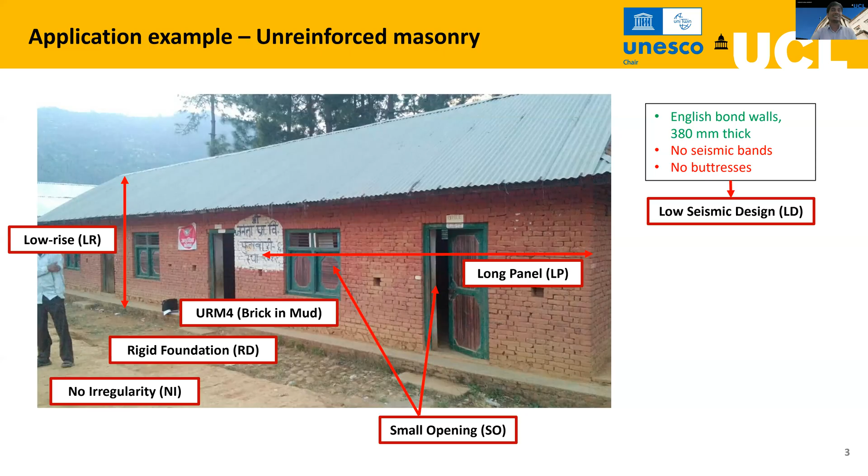Now, as you can see, there is enough gap from this building to others nearby, therefore no pounding risk. This structure is the original structure; there has been no retrofitting since its construction. And there is existing damage, the cracks, the fallen gables, therefore the building is in poor structural health condition.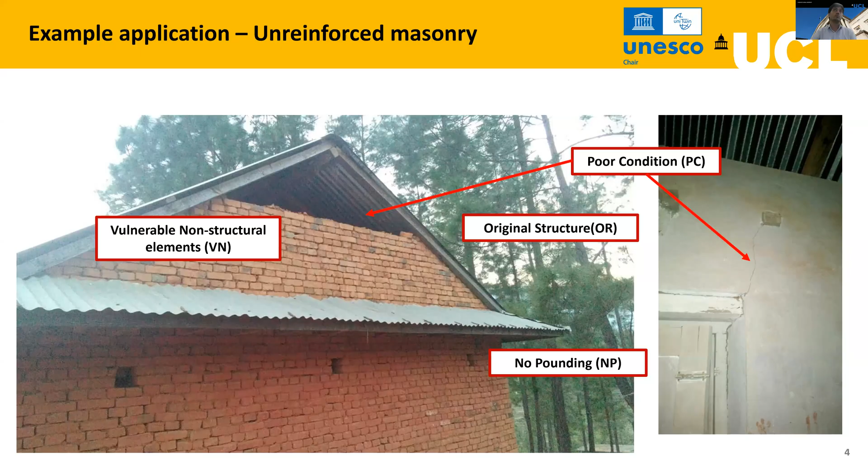There are vulnerable non-structural elements; the roof as well as the gable is vulnerable. And as you can see, this is an unbraced timber roof structure, which is flexible and has poor connection to the load-bearing walls, making it a flexible diaphragm type building. So finally, we get this taxonomy string: URM4, low rise, low design, flexible diaphragm, no irregularity, long panel, small openings, rigid foundation, no pounding, original structure, no retrofitting, poor health condition, and vulnerable non-structural elements.

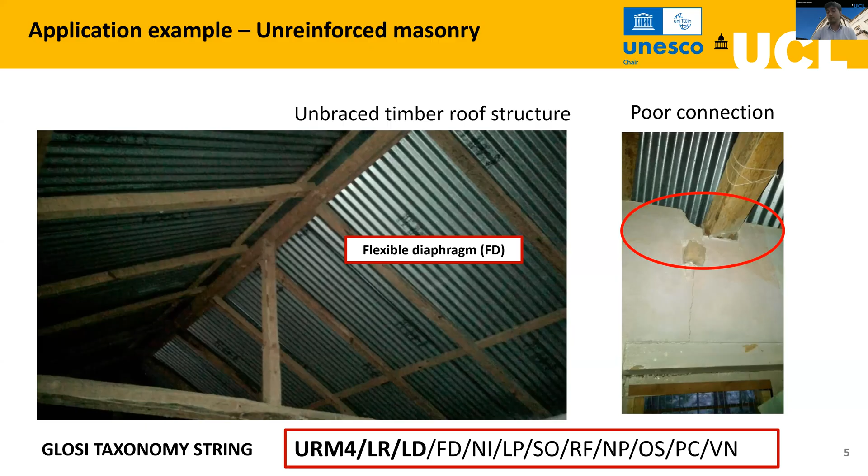Now I will pass on for the confined masonry case to Sana.

What you see here is a confined masonry building from India. We see a side view of the building and a complete view from outside, as well as from inside and the sides of the doors.

So for this first case, identifying the masonry fabric, we see that it's confined masonry in brick and cement mortar, so CM1. It's a single story building, so it's low rise.

Considering features such as a minimum level of confinement, and no evidence of good connections, whether toothing or dowels, we say it doesn't have good connections. Similarly, it doesn't have sufficient wall density in terms of transverse walls and no confinement around the openings. So that makes the building fall into the poor design category.

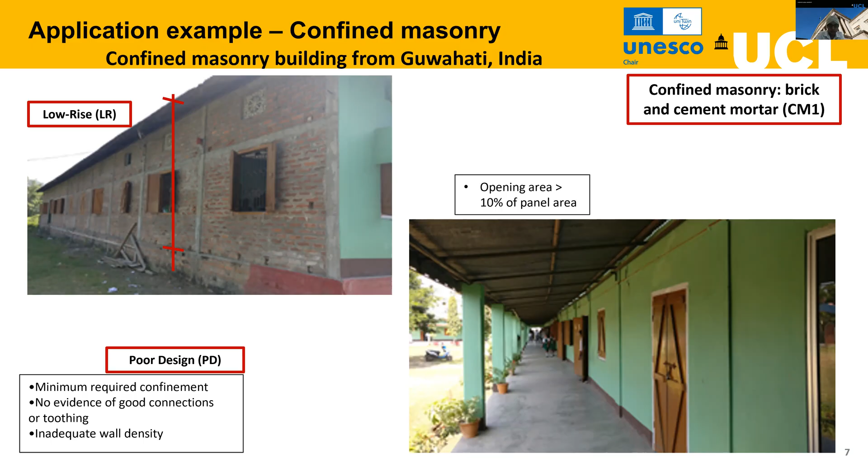Similar to the previous building, it has flexible diaphragms without any horizontal bracing. There is no irregularity. It has a horizontal or rectangular plan.

With respect to the panels, we see that the distance between the panel tie columns is more than 3 meters, as we defined in the case of confined masonry. And the openings are large openings without confinement—large because in this case we've defined it in terms of the area of opening, which is more than 10% of the panel.

With the foundations, it's again difficult to get information from a field visit, but considering it has shallow foundations throughout the wall length, we consider this a rigid foundation. Other parameters are the pounding risk. We see no other adjacent buildings, so there is no pounding risk, and there is no evidence of retrofitting, so it's an original structure.

We see that it's maintained sufficiently well, so it can be considered in good condition, and there are vulnerable non-structural elements such as the false ceiling. So considering this, we have the string that is now complete: poor design, flexible diaphragm, low-rise CM1 building. We can now discuss the RC case.

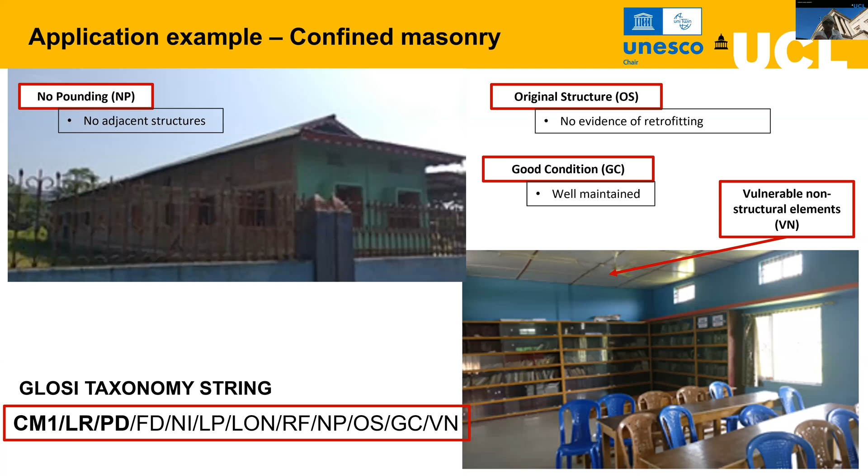Thank you, Sana. And finally, we have the RC case, in which we have this building that looks very new. We can define it as moment resistant frames. Here we have isolated infill walls that are not very clear from the picture, but you can see that from the field visit. We have a mid-rise building; in this case, we have only 2 stories.

For the design level, in this particular case we had the structural drawings, so it was possible to identify the minimum structural element dimensions of the columns and beams. We can also see the stirrup spacing, and based on this, we can define that a ductile collapse mechanism is expected for this building, and therefore we have a high design building. This was also built after the 2011 latest code in the country, so we can consider this a high design building.

We can see also that there are no irregularities. This is a rectangular block and there is no vertical irregularity. We can also measure the span of the columns, the distance between them, and we can see that in this case it is a short span. We don't have a distance greater than 6 meters.

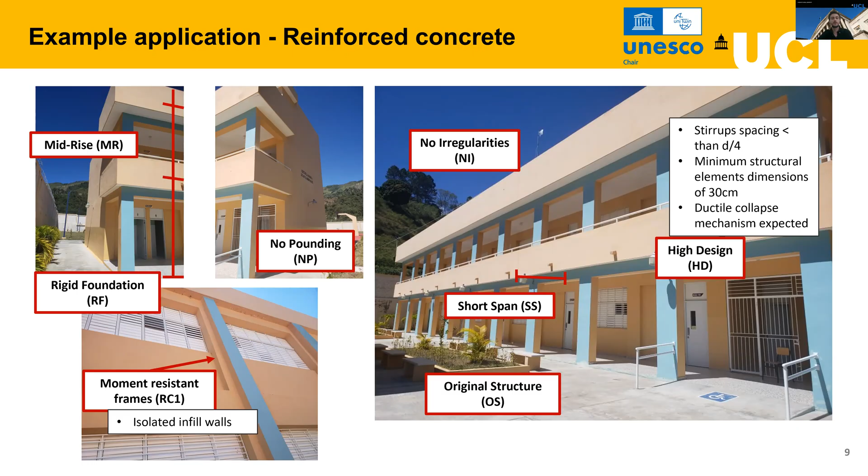We can also see in this case that this is a rigid foundation. We have isolated footings in a hard soil, so it is safe to consider this condition. The building is isolated from other buildings, so there's no pounding risk. We have that this is the original structure, with no type of retrofitting, and the condition, as you can see in the picture, is good.

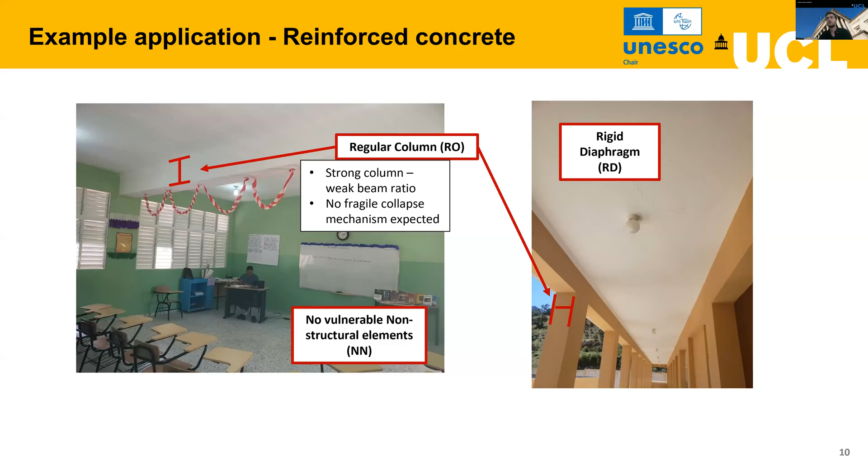Finally, we have the regular column conditions. In this case, we can see the dimensions of the column and the beam. So what we can define from this and from the structural drawings is that we have a strong column and weak beam ratio. So we can safely conclude that no fragile collapse mechanism is expected for this particular condition. So we assign the regular column element. And since the floor and roof are built as a concrete slab, we can also say that we have a rigid diaphragm. Finally, we can see from the pictures that there are no non-structural vulnerable elements, so the conditioning here is NN.

And in this case, we can also define a GLOSI taxonomy string in which we have RC1, mid-rise, high design as the main parameters, and then we have the following secondary parameters as shown in this slide.

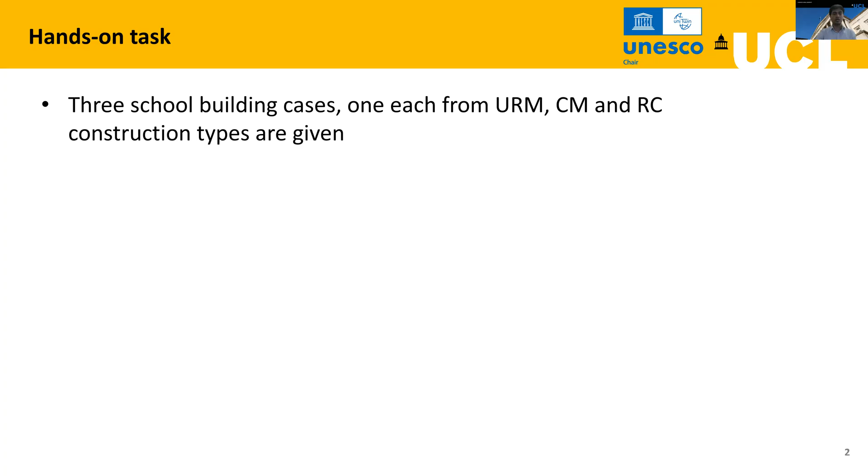Thank you. So the next presentation is about the hands-on task we are requesting you to do on the application of the GLOSI taxonomy, similar to what we showed you just before. So I will give you some details of what the task is about. We are giving you 3 school building cases, one each from URM, CM, and RC construction types. The information for each building includes photographs, notes, or drawings similar to what is typically collected during field surveys of those schools. Your task is to study the given information, the photographs, notes, and drawings, and identify the attributes of those 12 parameters of the GLOSI taxonomy, as we showed you just before. Finally, please generate the taxonomy string for each of those 3 cases and submit, hopefully, by tomorrow 10 a.m.